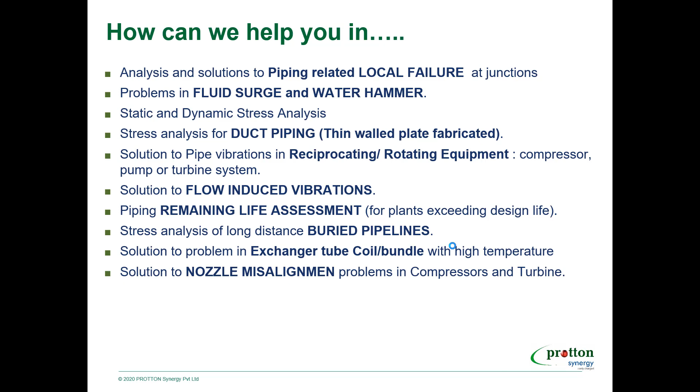Our niche capability is to solve industry problems, and therein I realized we should have more awareness towards FEA and CFD. It has been quite long, 25-30 years we have been using software like beam element analysis, and the stress engineer should know something more than that.

So my first question is, you can definitely write in the chat box: what is the most accurate method? Analytical method, FEA method, or experimental method? These are the three methods by which you can solve the problem.

So we have got the answer as FEA, the most one. Okay, analytical is the most. Actually, to be honest, experimental is the most, because you are actually doing the experiment and you are getting the answer for that given boundary condition with all kinds of plus and minus.

So if I keep experimental aside, not involving it into the things, because we engineers first prove everything is correct on paper and then go for experiment - if I keep aside experimental, then the analytical is most accurate. So analytical method is the one which is the most accurate one.

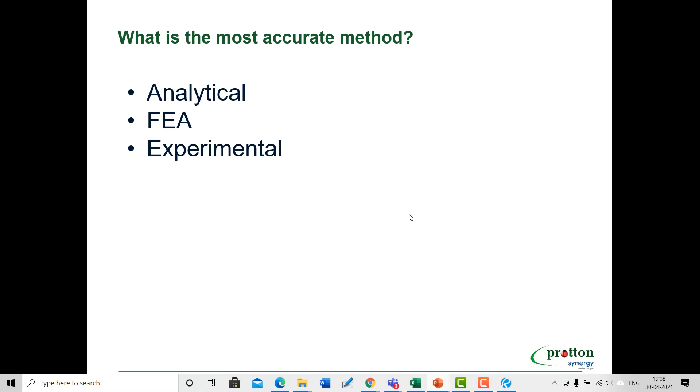Now just moving ahead, if there is a simple problem I want to solve, which is having a cantilever for example, and I want to have the deflection of this cantilever, then I do have a formula like - let me see here.

Okay, so I can have a formula like WL cube by 3EI, which can give me the answer. Now this can be done by an analytical method and at the same time with FEA. Now the main difference is, when we are doing the analytical method, we are mainly interested in the fixed point and the point of application of force, but whatever is happening in between, we do not know much.

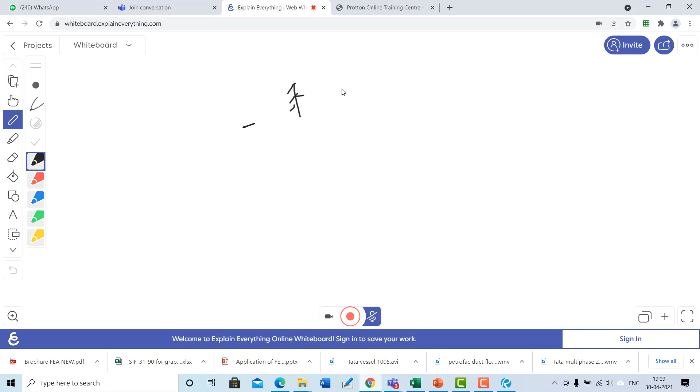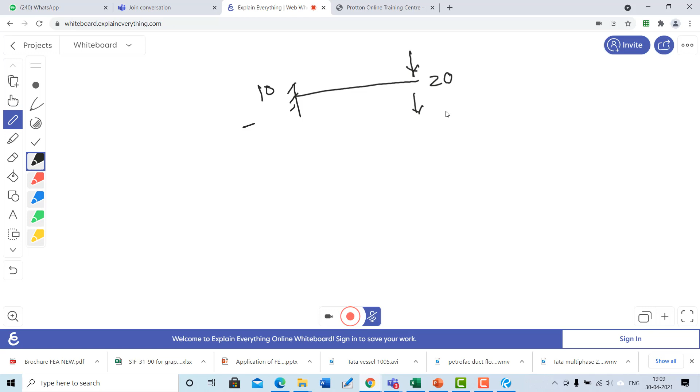Or in the pipe stress analysis software, okay, when you apply a force, say node number 10 and 20 - I won't take any name of the software, you know all the softwares - what happens is that I get the displacement of say minus 10 mm, and here I get the displacement as 0. So it means if I want to draw a line, it would come like this. But in reality, the deflection could be like this.

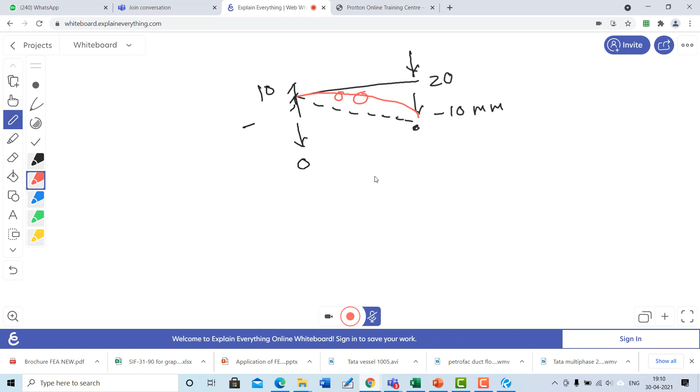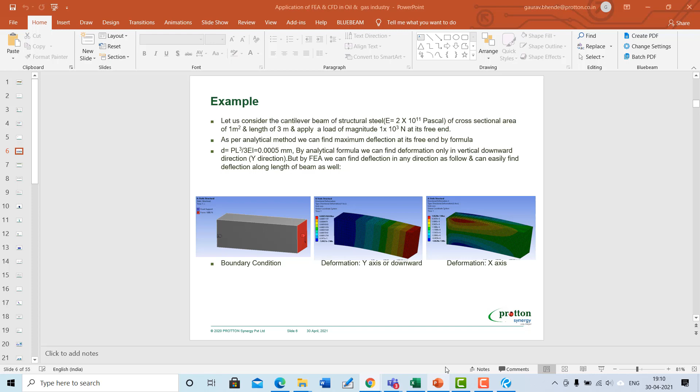So I do not know what is happening in between, and this is called a shape function. So if I don't know the shape function, then I don't know what is happening in between, and here the FEA helps you by breaking it into various, or thousands, or hundreds of elements.

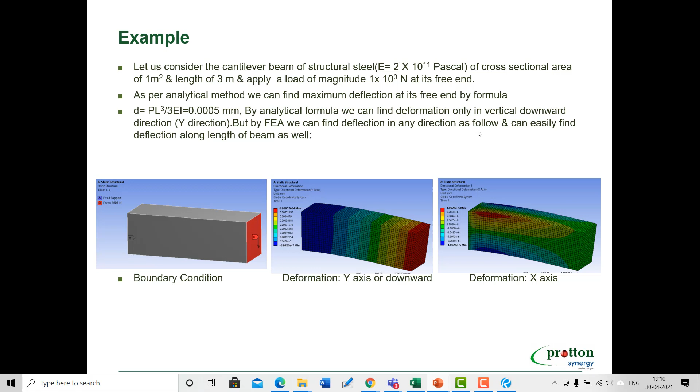Definitely we are not going to discuss deep into what is FEA. This is not the class for that. It's mainly the class of case studies wherein you are interested. So today not only FEA, we are going to even talk about CFD. Most of us take them as the same. Definitely both are numerical methods, but they have some differences.

They are the ones wherein the simulation of any given physical phenomena uses numerical techniques. So they actually simulate what is going to happen at different points. Now when you go with the element method like FEA, it uses the element method to solve with the understanding that the volume is constant. And when you go for CFD, it uses the volume method.

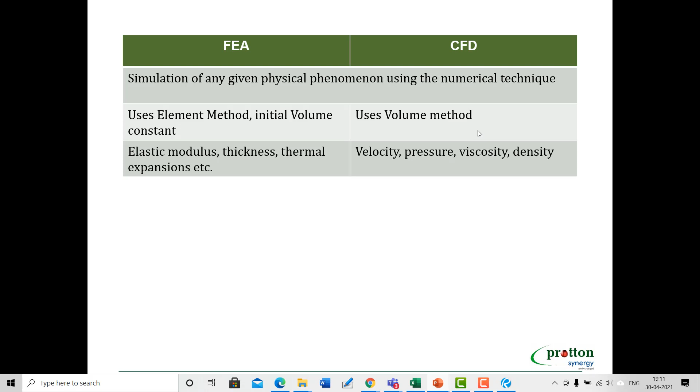For FEA, you deal with elastic modulus, thicknesses, thermal expansions, etc. Whereas for CFD, you are more interested in the velocity of the fluid, the pressure variations, the viscosities, the densities - all those matter. So today the main focus is on FEA, even though we are going to discuss a little bit of CFD case studies as well.

Now the calculations are made for every single element, and then it is combined. So what we do is try to break the problem into finite objects, and then try to merge them. Why do we do so? Because, as you just saw, with shape functions we don't know what is happening in between, but by making the problem discrete, we use elements and we know everything about the elements.

So if the problem is split into elements, the answer for any irregular geometry - like not a pipe, a hexagon, or even a random shape - becomes easy.

So why we are performing FEA and CFD is because the conventional software, the software we use, sometimes provides a conservative answer. Every time when you do not know anything - for example, I don't know the stress intensification factor for a 45° T section, and somebody tells me to take the 90° T SIF and multiply it by 2.5 without any basis. As a stress engineer we hear from here and there, listen to our seniors, some emails and all, and straight away say it is 2.5 without a base. The conservative approach may not be right all the time.

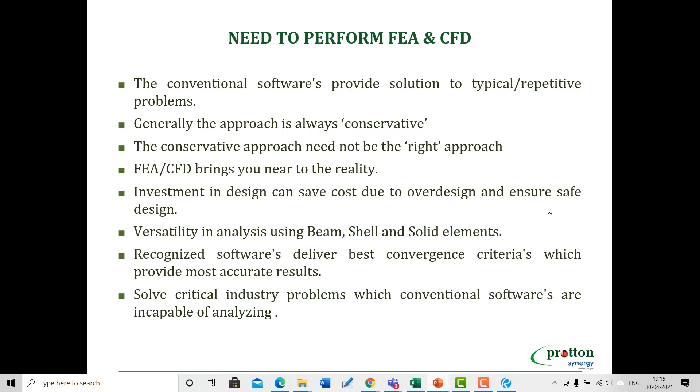The versatility in the analysis using beam, shell, or solid elements - it's your choice. The recognized softwares deliver the best convergence and solve the critical industry problems we are actually interested in.

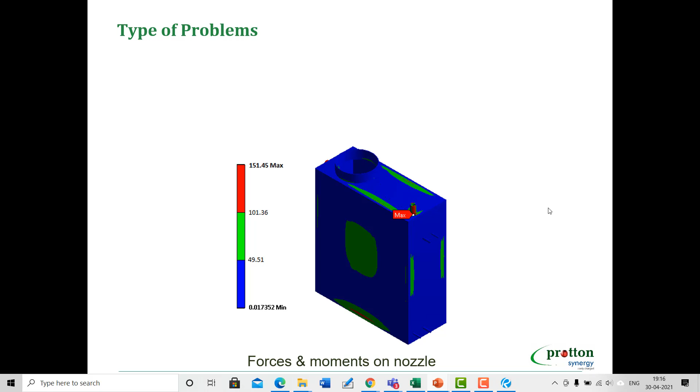Now let's take one of the common problems. Generally you deal with forces and moments on a cylindrical shell. Now this is a rectangular shape, and this small nozzle has a problem of forces and moment. Let me know whether this problem falls under which kind of category - static, dynamic, linear, nonlinear - what kind of category it is. Just let me know the answers in the chat box.

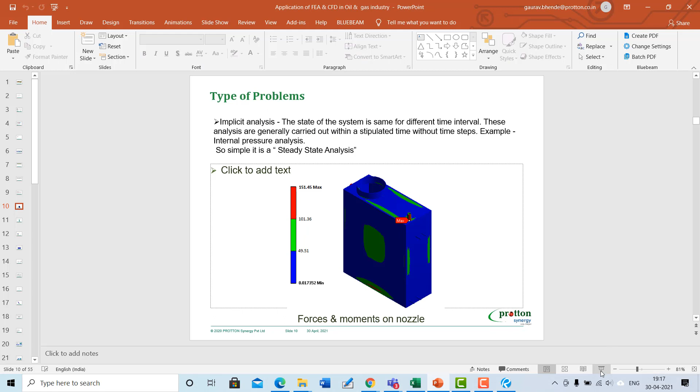Since it is having forces and moments on it, this is very important. As a stress engineer, let's not be only an engineer who knows a particular software and does the software entry. Always ask a simple question to yourself: if somebody takes away the software from my hands, will I be able to give the solution?

That's the simple answer. So this kind of problem is a simple steady state analysis. Nothing is changing with respect to time, and that is our assumption. In FEA language, we call it an implicit analysis.

The state of the system is the same for different time intervals, meaning it's not changing. For example, in internal pressure analysis, the pressure is given and is steady for all time. So what are the longitudinal stresses, what are the hoop stresses? These problems are called implicit.

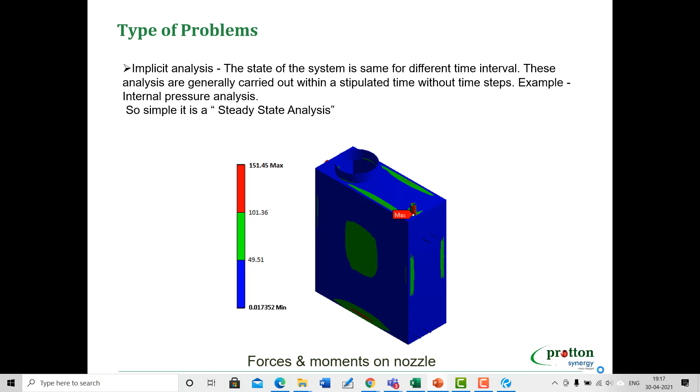These kind of words you will hear from the mouth of an FEA engineer quite often. As a stress engineer, if you are dealing with an FEA engineer, you should know this.

It means that initially there is tension in the bolt—this is a commissioning stage, I would say. Now the pressure comes in, and when the pressure comes in, the flanges would like to go apart, away from each other.

Now here we have two time intervals: one is the pretension, and second is the pressure acting. Somebody wants to check both of them. The simplest way in our stress analysis is a kind of load case, but we cannot do this kind of analysis in our software, and this is called explicit.

The state of the system varies with time interval, and that is what we call a time-step analysis. The variable time is a crucial factor. The duration of the analysis is defined by the end time and the steps.

Examples are seismic analysis or this kind of bolt pretension. In seismic analysis, what we call it is a dynamic analysis, or a time history analysis, or more precisely a response spectrum analysis. These kind of analyses fall under explicit.

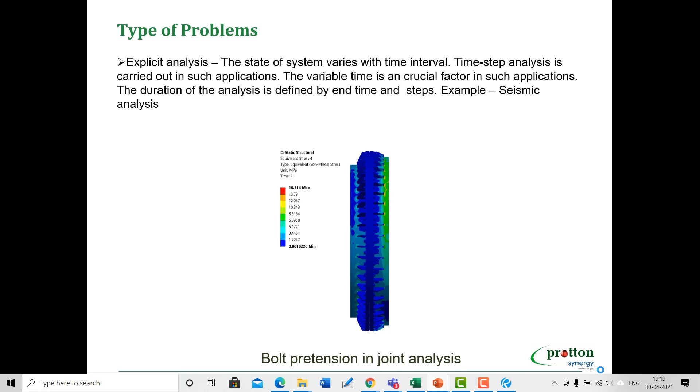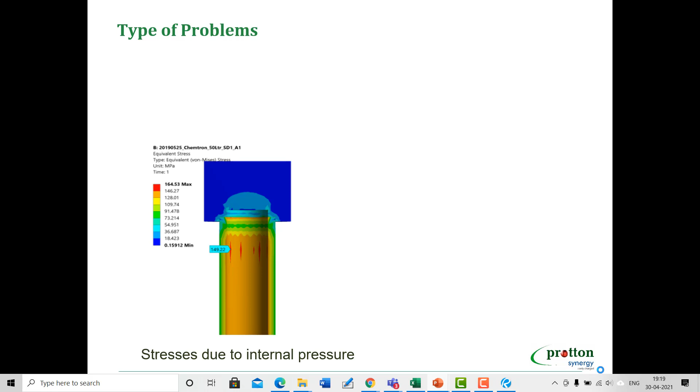This is one more thing wherein, say for example, some forces and moments I want to study at a junction. Now if my stresses are within the stress strain curve, below yield strength value, then this is called a linear analysis.

So all your primary stresses, for example weight and pressure driven stresses—the allowable limit, all of you know, is minimum of 1/3 of ultimate or 2/3 of yield. So the code is not allowing you to cross the yield strength.

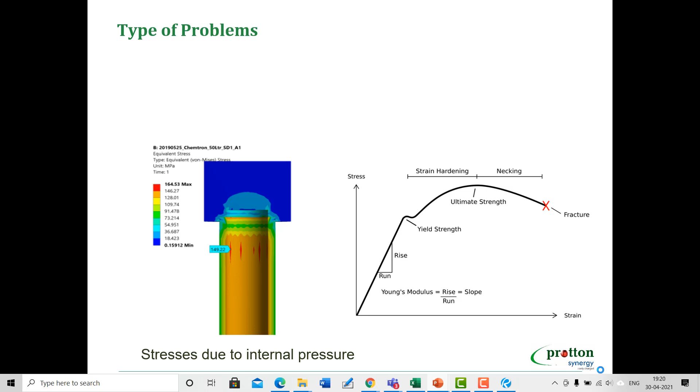But when it comes to a problem of secondary stress, for example thermal stress or temperature driven stress, the code—I am talking about code 31.3, or Section VIII Division 2, or Section VIII Division 1—allows you to cross the yield strength limit as well, because those kinds of stresses are self-limiting, and in that case you can cross the yield strength.

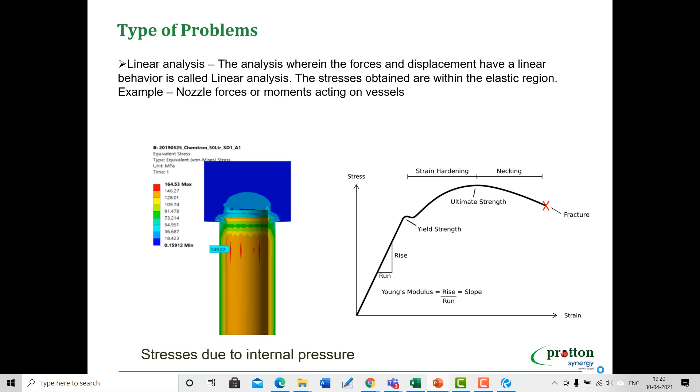Now when you are not allowed to cross the yield strength, the approach becomes a linear analysis approach. So the forces and the displacements have a linear behavior, Hooke's law is valid. This kind of problem falls under linear analysis.

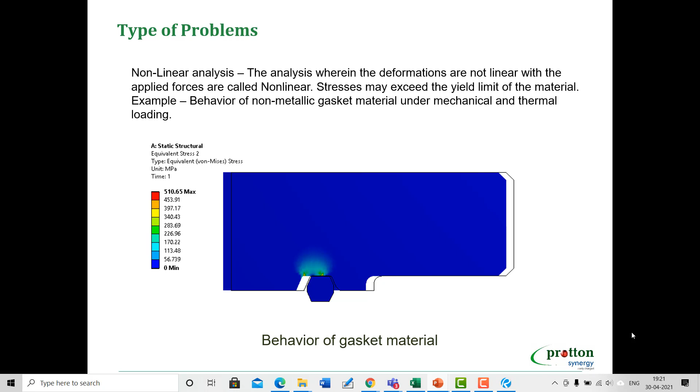Now all of us know that when the gasket is compressed, it can sometimes go beyond the yield value, and if it goes beyond that, there could be a permanent deformation which can even cause a leak. If you want to analyze such a problem, it falls under non-linear analysis—where the deformations are not linear with respect to the forces. So even non-metallic gaskets or non-metallic things can also go into a non-linear analysis. As a stress engineer, we should know this.

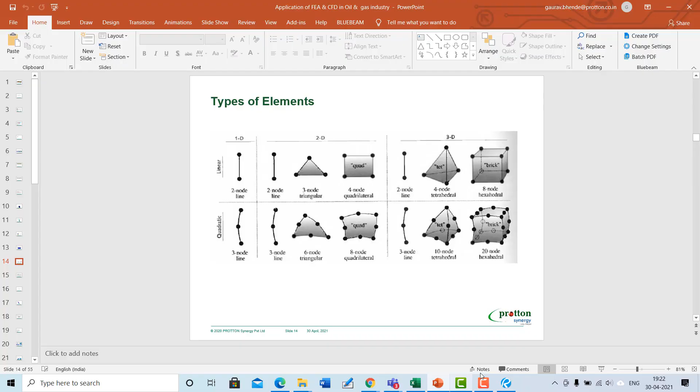Now one more question. We are using this software - do you know which kind of element is being used inside it? Can I get the answer in the chat section? For normal softwares where we come across pipe stress analysis, we go with the beam element.

The beam element is very good when the diameter is not much changing, the thickness is not much changing, but the length is changing a lot. So at that time we are more interested in a beam element software.

Now these beam element software cannot analyze the shell. So even if you see a nice 3D pipe in your software, with good color, blue, gray, shadow effects and everything, the client thinks you are really modeling a complete pipe. But no, you are not. Those who have used very older versions know that the pipe used to be shown as a simple line, the way it is shown here as a 1D element.

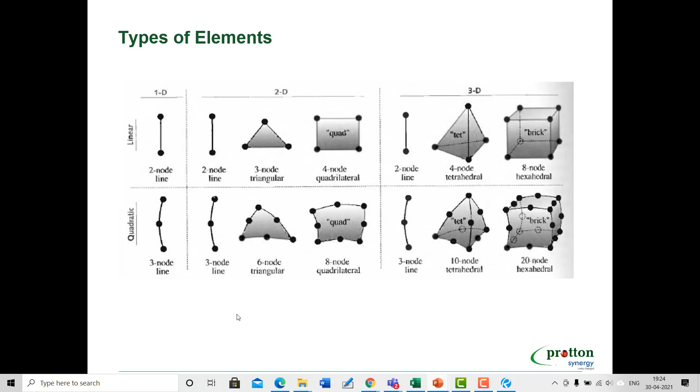So when it comes to FEA analysis, we have got various elements - the 2D elements, the 3D elements. What is the use of these elements? For example, if I go with the 1D element, I think we have got a comparison.

Now you can see here the comparison of 3 elements. It is representing only the dimensions, meaning the length. When it's giving only the length, the other two aspects - area or volume - you are entering them, you are not building them. That's why in software you enter diameter and thickness as a property, but it is not getting built. So whatever is getting analyzed is assuming that the pipe is a thin dimensionless beam.

When you want to analyze a shell of a pressure vessel, or a pipe to pipe junction where there is an unreinforced T or stub-in stub-out, then you have to develop the surface. Just imagine you have playing cards in your hand, and you take one card each and paste it on the pipe, forming a pipe - that is a 2D element. Each playing card has an area but negligible thickness, so it cannot do any analysis accurately across the thickness. That is the 2D shell element.

And if you have a brick in your hand and you're building a pipe brick by brick, as if building a cement pipe, then the brick in your hand is a 3D solid element. You know everything about that brick, so it gives the most accurate results. Now regarding computational time and accuracy - the 1D elements are very fast but less accurate across the area and thickness. The 2D are a little more accurate, and the 3D have the highest accuracy.

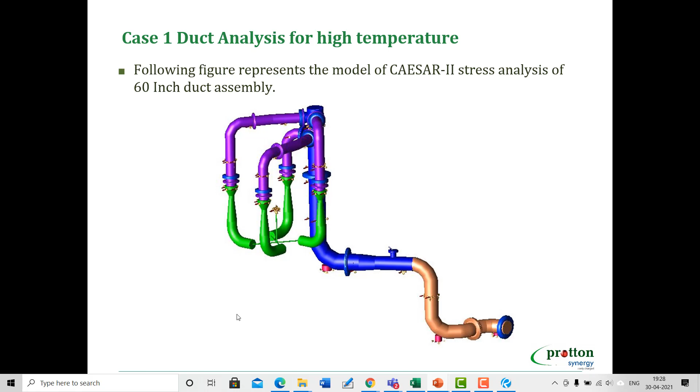Yes, you can use Caesar, but you cannot calculate the accurate SIF, and you cannot do buckling analysis using Caesar. For those aspects, you have to use other software. But if you want to do a simple bending calculation, weight calculation, thermal expansion, yes, you can very well use Caesar.

In this case, our case study, or our scope of work, was to calculate the stress intensification factor. All of us know that Appendix D of 31.3 says that if the D by T ratio crosses 100, then the formulas given are not accurate, and you can go for a better or alternative method. So how do you calculate the SIF?

Now people even talk about 31J, which has come very newly. I don't know how many of you have actually read 31J - it's a thin book, probably a couple of hundred pages or even less than that.

Now when you want to do an FEA analysis, you have to refer to ASME Section 8 Division 2, which tells you the SIF definition as range of peak stress. When I say range, it is on the upper yield and lower yield side, and that's why in the denominator there is a 2 present - 2 into moment by section modulus, which is nothing but the nominal bending stress at that point.

If you see the next equation, PL plus PB plus Q plus F - this nomenclature a stress engineer must know. It is even used in WRC: the primary stresses or longitudinal stresses, the bending stresses, the secondary stresses, and the last portion is F, which is nothing but the peak stress.

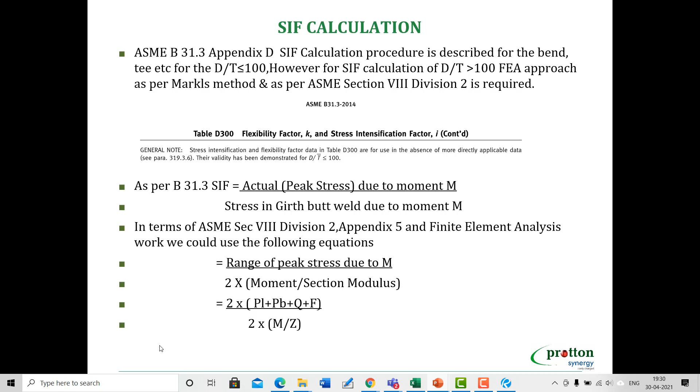Now the peak stress cannot be calculated by hand calculations - therein you need the software. So this was our case study for a 60-inch duct assembly. Diameter was 1540, thickness was 8 mm. Now look at the temperature - 700 degrees Celsius.

It was an excursion temperature, a small time temperature. Normal design was 360. So when you are doing such a high temperature analysis, you come across so many problems, and you should know the code in depth.

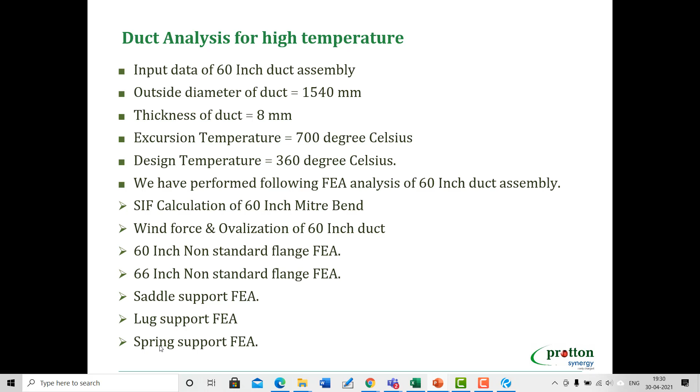So Ninad or Amit, would you like to add something on how we have done the analysis? Because I would even like to introduce it to my team.

That is the use of finite element software, because we cannot model these stiffener rings and evaluate their effect in a beam element software.

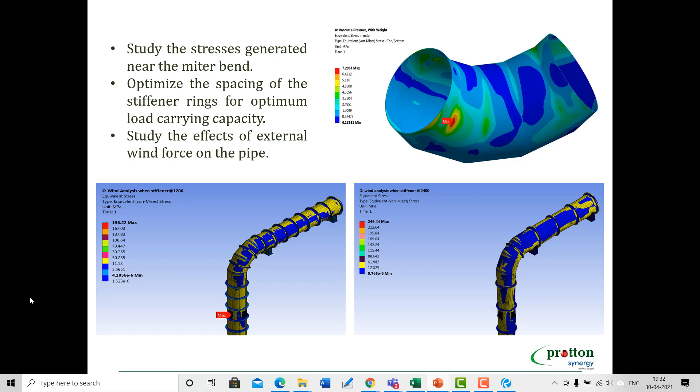These failures may not happen immediately at site because they are secondary in nature, and in such cases we may have to do FEA - even the tee SIF, the stress intensification for T.

One of the misunderstandings regarding FEA software is that when you do FEA, the SIF always decreases. That is one of the misunderstandings. It means when you find any failure in your beam element software for, say, a 24 inch by 6 inch branch, people always say do FEA and qualify it, but that's not always the case.

Especially we realized when we did the duct SIF, sometimes B31.3 SIF are lower and FEA SIF are twice or thrice that. So we have to come out of this approach, or understanding, or belief that FEA always solves all the problems. It solves, but it will give the realistic answers.

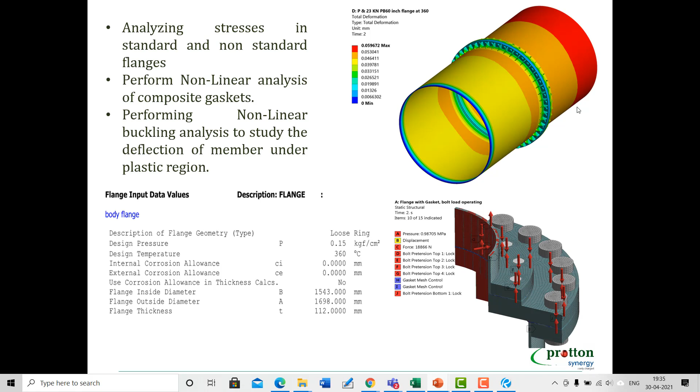So there could be a difference of radial growth. So we had even suggested the groove across the bolt, wherein the bolt can radially move freely. And then we wanted to check whether the flange leaks or not. So for that, we checked the seating stress, whether the gasket is seating or not. So these kind of analysis, when it comes, the FEA is very much useful.

So in this case, if you go with the stresses, then the stresses can go beyond the limit. And at that time, you have to take help of strain based analysis. So very few engineers know that there is a strain based analysis as well, and which can be used, and even code allows it. So I'll be showing you one of the slides afterwards, wherein there was some strain limitations given. So instead of checking the stress, we check the strain, and it is allowed for the secondary stresses, not for the primary.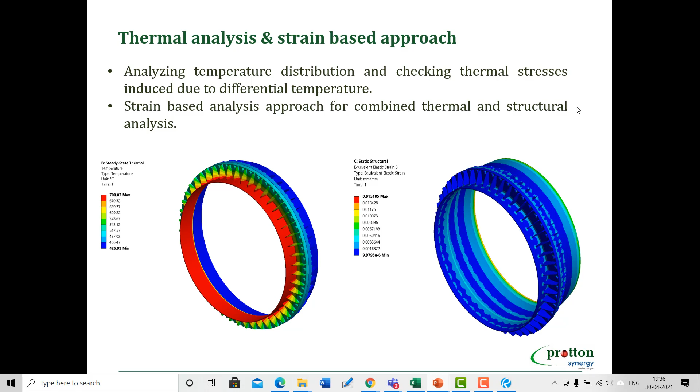So all these aspects we have to study. Stress analysis is not only data entry and data out. This is one more case study we did. It is an assembly inside the heater, okay, wherein so many punctures were given to one common header. So the entire analysis was done in beam element software, the software what we use, Rohr2, Caesar, AutoPIPE, K-pipe.

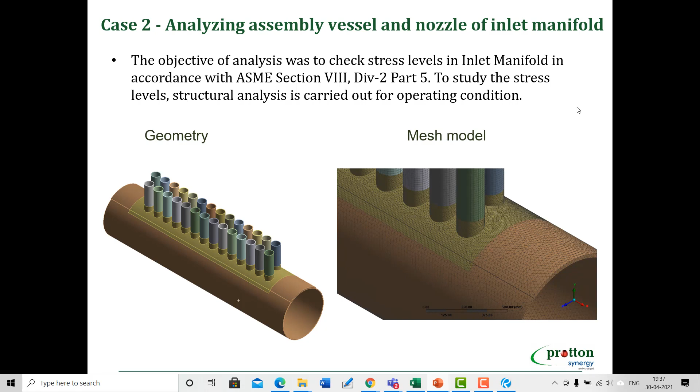But there are some provisions, or rather restrictions, given in ASME code, that when the punctures are very close to each other, in the close vicinity, you cannot use the normal SIF what we have. So you can't just give the SIF at each and every point and get rid of it. It's not allowed. So for that, the FEA is required.

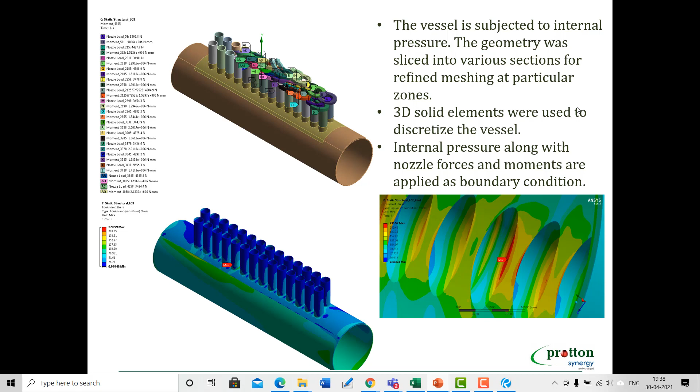So we have done, so the boundary conditions were taken by the beam element software. Boundary condition means the rotations and the displacements, and the forces and moments as well, and local stresses were checked. So don't be under the impression that in FEA software you should be able to model the entire duct assembly or entire heater coil. That will take millions and millions of nodes. So the FEA shall be used at local problems, and we had used the 3D solid element, this kind of thing.

Now here you can see when the stresses are crossing the limit, there is something called linearization, what we have to do. Okay, so linearization tells you when you get a peak stress, because something comes red in FEA, and that is the reason why stress engineers are afraid even to check the FEA report, because they don't know what to check.

And even by having this seminar, or by having the FEA training or learning, at least if you're able to check the FEA report, that is also a good achievement. Even if you add in your CV that I can check FEA report, that's a good thing. Now the standard FEA training what you get in various institutes after college, they only talk about the FEA as a software. But when we teach FEA, we talk about the oil and gas industry exclusive codes and standards.

That's why this seminar is to have the awareness. FEA is very widely used in the automobile industry or defense industry, where the shapes are random, but it's very negligibly used in our industry, and that's why we are not aware of these terminologies as well.

When I do the linearization, the answer is exactly the same. If I ask you, why in 31.3 we check primary stress separately, secondary stress separately, and occasional stress separately, why don't we combine them and check? Why do we have different load cases? The simplest answer is, if I get a failure, how would I come to know, if I combine all the cases, whether it is because of pressure or weight, temperature, or earthquake, because all of them have different modes of failure.

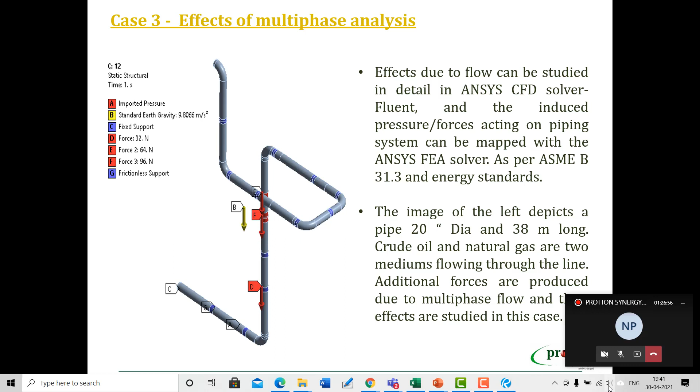So this is a fluid structure interface analysis that we did in FEA and CFD. First we did this analysis in CFD, computational fluid dynamics solver, and we later mapped those CFD results into the FEA solver, so that we can get the actual exact forces and pressure at the node points, and we can map those into the FEA solver. Please move on to the next slide.

Now what happens in such kind of analysis is the liquid phase, that is the crude oil, tries to capture the gaseous phase until the velocity increases and the kinetic energy of that medium increases. So there are induced forces because of this action, and the kinetic energy of that system increases. Now the main parameter for fluid induced vibrations is the kinetic energy that can be caused because of closing of valve or opening of valve or obstructions or multi-phase flow. So this is one of the applications where two-phase flow causes induced vibrations in this system. Moving on to the next slide, please.

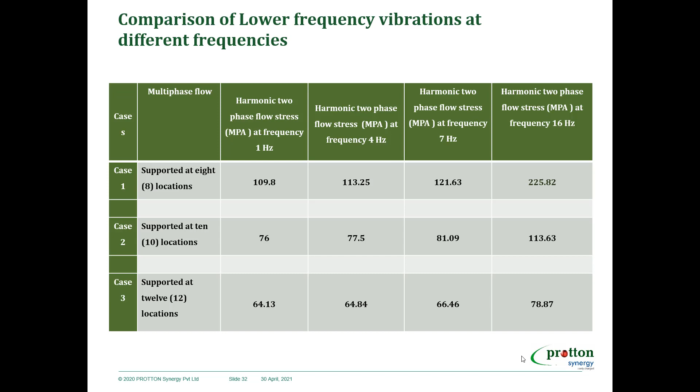So this is the allowable limit that you have for the particular material. The allowable limit in this case was 115 MPa, and we carried out harmonic analysis, that is lower frequency analysis, and from that analysis we saw the stresses at 1 Hz, 4 Hz, 7 Hz and 16 Hz. We had a few support conditions or support locations throughout the pipeline, where the pipe was supported at 8 locations, 10 locations, and 12 locations. From this table we can find that when the support assembly is supported at 8 locations, the stresses are around 225 MPa for the 16 Hz frequency, and during 12 support locations the stresses are quite within range.

And when it comes to civil applications, there were a few constraints while applying supports, and that is the reason. You can see the blue region, this is the support conditions that you have in the system, and initially 8 supports were provided, and later the supports were increased and 12 supports were provided for the system. It was necessary, and this was carried out using the fluid induced vibrations phenomena.

The methodologies for FSI, the full form of FSI is fluid structure interface.

Ninad, I'm just interrupting. Can you see the video on the screen? Yes, sir. Okay, fine. Now you continue.

So this is from two-phase analysis. This video depicts two-phase analysis. You can see the movement of liquid and gas throughout the line.

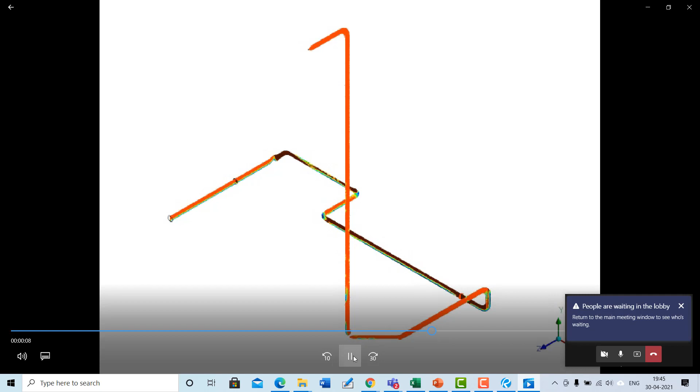And so in such kind of applications, during bends, there are forces which act on the bends due to the flow, and we need to restrict those forces and constrain those forces. But number of supports increases the costing in the system, and that's why we need to provide such kind of similar supports.

Okay, good. So here are 2-3 things what Ninad is trying to tell. So those who have just joined, Ninad has told one thing wherein there is a change of velocities because of the phase changes which can happen, which as a stress engineer sometimes we do not know, and even our process people, we don't have that much close interaction with them. So they just give us the pressure, temperature and everything. So my personal opinion is even the stress engineer should know the flow regime.

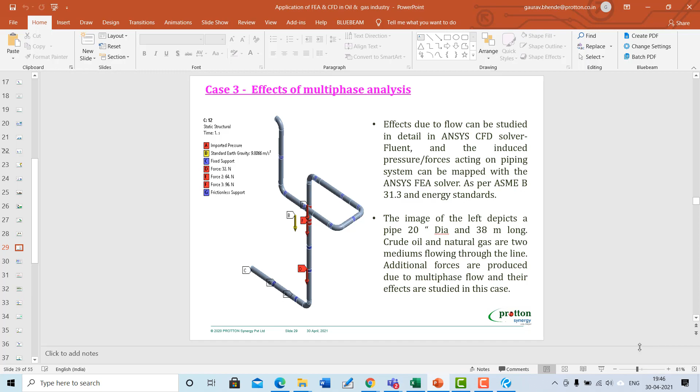And that's the reason we have started doing the surge and all these kind of things, wherein we try to superimpose both the aspects, the surge, the fluid and the structure. Yeah. Okay, Ninad, go ahead.

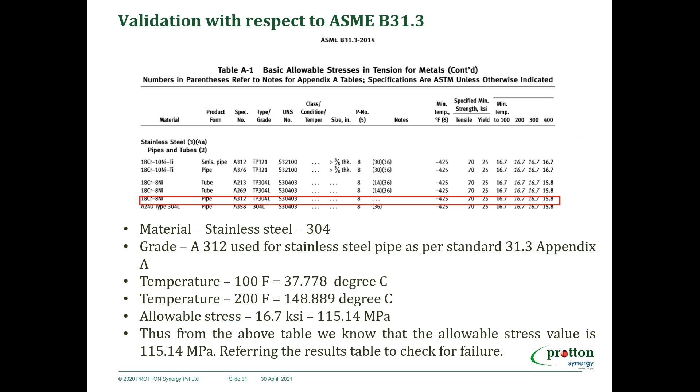Okay, so can I go to the next case study? This one? Yes, sir. Yeah. Yes. Now, this is an interesting one.

Injection quill is very common for us, wherein what we do is we have got a header and we are injecting something. Now, this is being supplied by a manufacturer or a fabricator. So the simple question the consultant asked, since there is a change of pressure and the temperature, means the pressure inside the header and the pressure inside the injection quill are different.

So will there be any thermal shock? Because there could be a sudden change of temperature, and at the same time will there be any vibrations? So this was a case study what we did.

Ninad, can you explain, or Amit, on this case study further? There were 4 different mediums that were passing in the line. There were 2 different mediums from the header line and 2 different mediums from the quill side. So there were altogether 4 different fluids that were passing in this medium.

Now, due to the geometric constraint, there were turbulences created when the fluid moved out of the quill region, and the quill experienced a thrust because of the fluid flowing through it. At different points when the fluid passes through the quill, there were pressure differences and turbulences that were created. As I earlier mentioned, these turbulences cause induced pressure in the line, and we had to check what are the induced forces because of the turbulence caused in this particular domain or region.

So I am showing a video - I hope you can see that, let me know if not. So these are the 4 phases.

Ninad, can you explain these 4 figures, because we should understand? Yes, sir, yes, sir, yes, sir.

Yes, sir. So the nomenclature is that red is one phase and blue is the second phase. The bottom 2 images are the fluid flowing in the header region, and the top is the fluid flowing in the quill region.

As you can see, the upper chamber is the gas chamber and the lower chamber is the liquid chamber in the header part. Similarly, during the inlet at the quill side, the top chamber is the gas chamber and the lower chamber is the liquid part. So after the simulation, the fluid from both inlets mix at the outlet.

There is turbulence created, and because of this turbulence there are higher forces, and that's why we need to map these actual forces that we get from the CFD to the FEA solver.

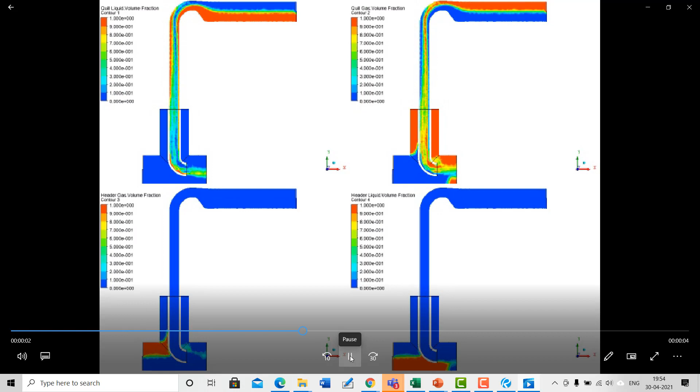And since we know this, we can even do a life fatigue analysis for this quill, which can tell you how many years it can survive, or how many cycles it can survive. So this is important.

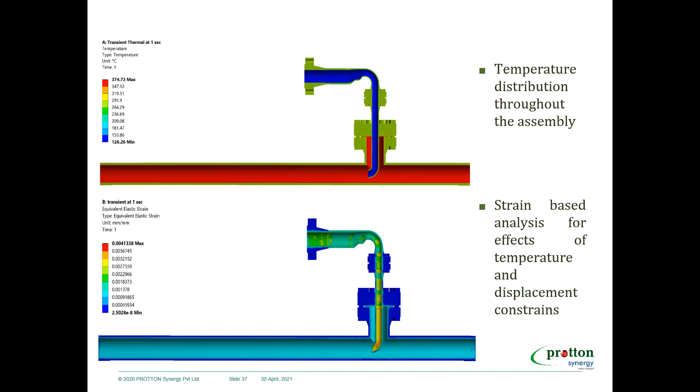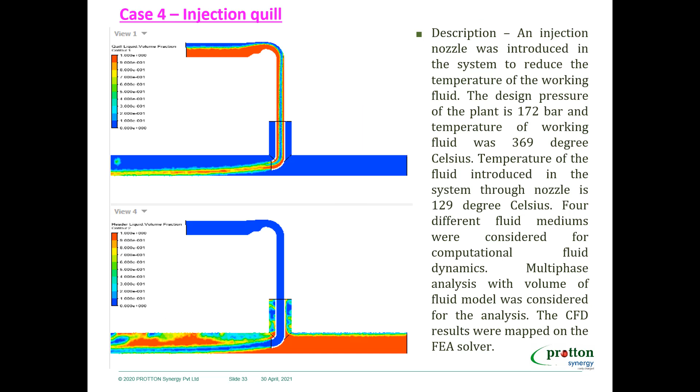One second, can you go to the top slide? Previous one, yes, previous one. Yes, here, just the top slide. Yeah. Just go to the next slide, next slide please. Next one, yeah, yes, here.

Here we can see that we have performed CFD and FEA analysis, but here we have also performed CAESAR II analysis. Yes, because the one who is working in the oil and gas industry, if he knows only FEA, it's fine, but if he knows Caesar as well, that is the advantage.

And if he knows only Caesar, they all know Caesar, but if they know FEA as well, that is the advantage. No FEA, yeah, exactly, that is right.

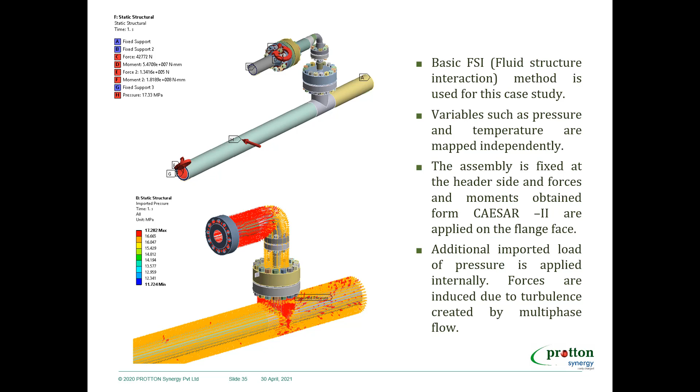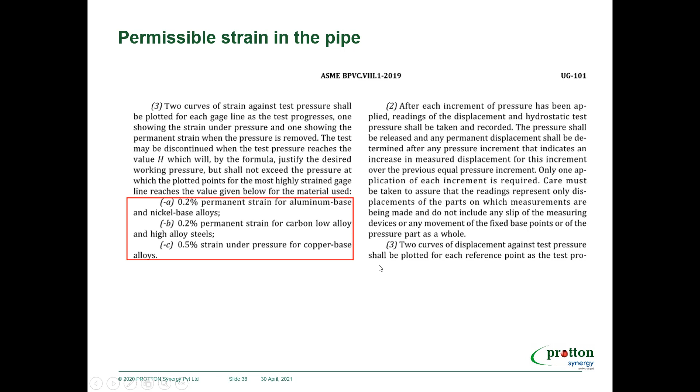So there are other references as well, but we should know these references and where to use them and in what way. Now this is for those who are from the mechanical static side who have joined us.

This vessel looks very normal, but on the right hand side there is a boot, and after the boot there is a saddle. Earlier this saddle was on the left hand side of the boot, and it was very close to the first saddle, and the boot was a cantilever one.

But the client said it's not possible or not recommended, and they shifted the saddle beyond the boot. Because of the space constraint, the saddle was very close to the boot, so they increased the local thickness by adding a doubler plate, meaning the pressure vessel shell is given higher thickness at a local area. You can see here a small white line, and part of the saddle was on this doubler plate and part was not.

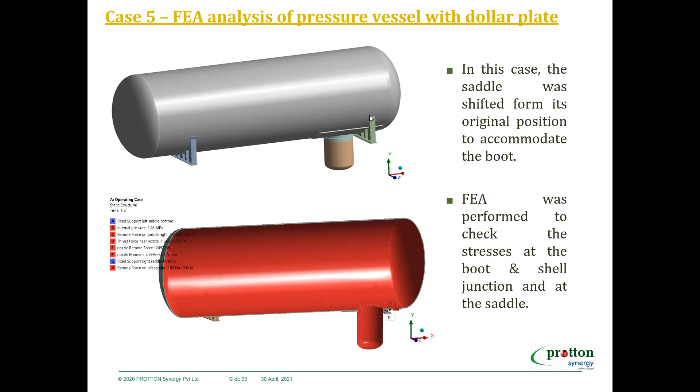When this kind of thing comes up, the code does not give you a direct solution or direct guidelines, and then it calls for FEA analysis. Here we learned a lot of things. Though the problem looks very simple, we learned how the pressure can show failure or the stress concentrations at the junctions.

Amit or Dinat, can you share the experiences of what we learned in this specific case study? So after we did the FE analysis, we found that there were bending forces introduced because internal pressure was applied on the boot region, and because of that the boot was slightly shifted downward, and the saddle being very close to it, we found higher stresses.

You can see a max point over here. So there were higher stresses induced in this web plate. There was also a center web plate, not shown in this image, but after analysis, yes, we had to remove it because there were higher stresses induced in that web plate.

We had to do linearization at the shell region, the boot region, and at the web plate of the saddle to check for the primary membrane stress and the stresses produced due to bending, and then qualify it with respect to the ASME standard. And there was a thrust because of the boot as well.

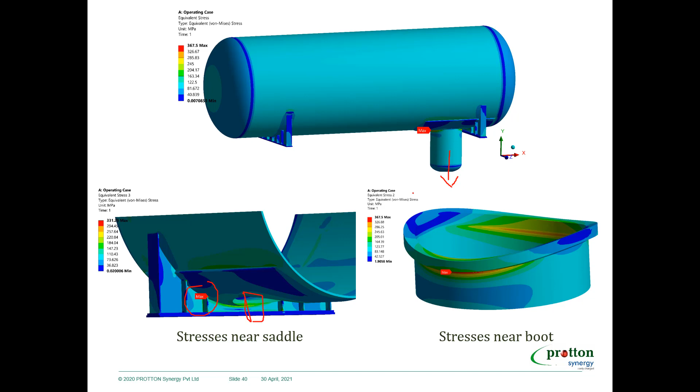So because of the pressure, you can see the pressure thrust. It's a very small video of 3 seconds.

So you can keep on repeat. I don't know where it is a repeat. Keep on repeating. Toggle. I don't know where it is a repeat.

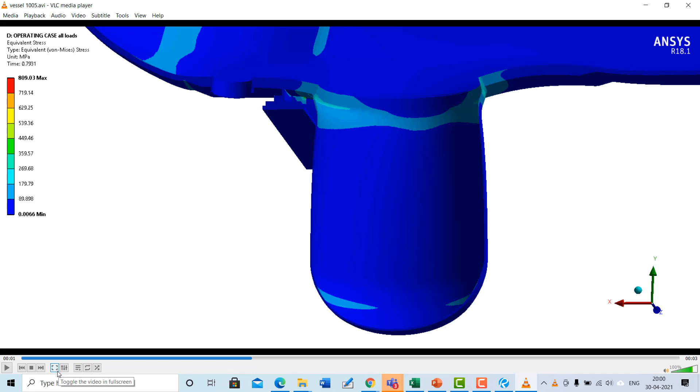So this analysis was very small work, but we learned a lot.

One more thing I want to add is the thickness of the doubler plate was approximately 60 to 90 mm in different tags, but when it comes to the boot, the thickness was 50 mm. As per different conventional softwares with respect to internal pressure calculations, it was qualifying, but for this particular application, because of the thrust force, we were getting higher results at the junction and at the saddle part.

Okay, Amit, can you explain the different kinds of stress limits? Yes, this is a table provided in ASME Section VIII Division 2. As discussed earlier, there are various kinds of stresses. Generally there are two types: primary stresses and secondary stresses. The primary stresses we classify as general primary membrane stress, local membrane stress, and bending stress. For example, stresses due to pressure come under the primary stresses.

Due to the pressure, membrane stresses are developed, like hoop stress or longitudinal stress, which develop across the thickness of a cross section under consideration. These are the general primary membrane stresses.

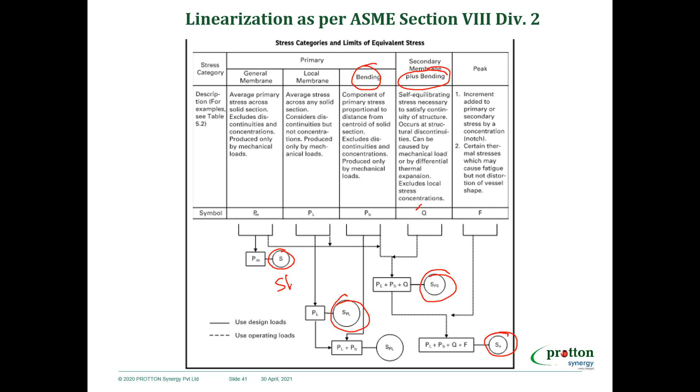This is the same limit SH, that is 2/3 of yield or 1/3 of ultimate, whichever is minimum. Based on the combinations, you can go to various limits, and the user should know which equation to use for which kind of loading.

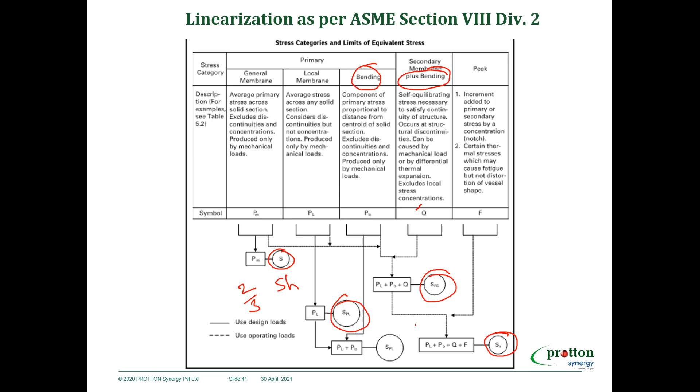Otherwise, sometimes even after doing FEA, you get failures that are not checked by the code properly, or not the way they should be checked. So you need proper guidance for that. This is the gap in information or knowledge that we try to fill up in our training sessions by taking actual real life case studies, to help you understand this.

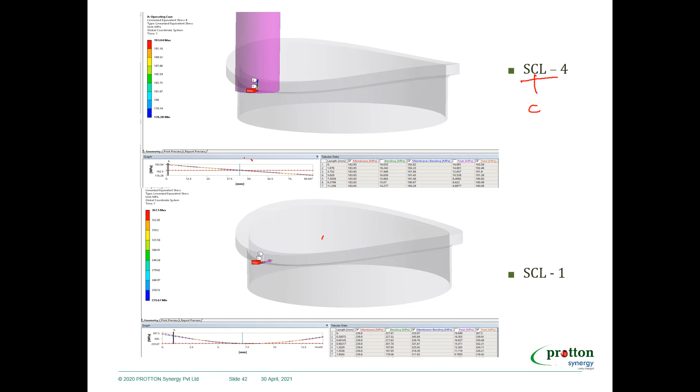So these are the lines of SCL, that is stress classification line - C stands for classification - which tells you whether it's primary or secondary, and these lines tell you what kind of stress it is.

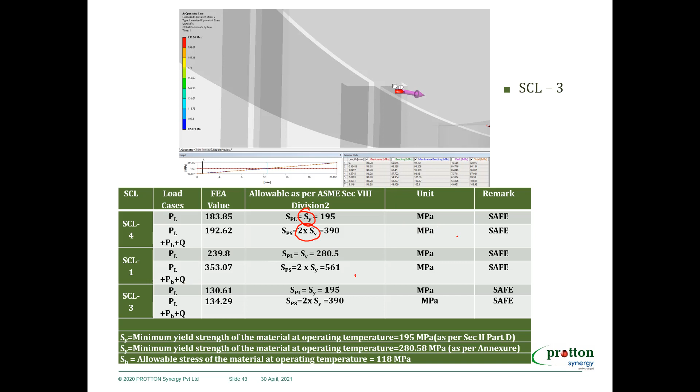Then here are the actual results, showing which kind of stress is to be used against which kind of allowable. You can see here 2 times SY is the allowable. Based on the type of combination, you can check whether it is safe or not. So by doing FEA, you can even save cost as well.

Now this is a pressure fatigue analysis. In our normal pipe stress analysis software, people often ask me, can we do a fatigue analysis? My second question is always, which kind of fatigue - do you want pressure fatigue or thermal fatigue? The fatigue analysis in our pipe stress analysis software is mainly thermal fatigue analysis. We are not doing pressure fatigue.

What happens is, because of pressure, this surface can actually deform like this. This simulation is not possible in our software because we model a pipe as a simple line, and the cross section is just a property or characteristic of that element - we are not building it. If you want to analyze this, you need to build the pipe as if you are holding playing cards in your hand, keeping them one in front of another. That is how you should build a pipe - that's what we call meshing - using a proper element, like a shell element. Then you will come to know what is happening across it.

For further accurate analysis, if the pipe is thick, you may have to go for a 3D solid element as well. This was a pressure case with 2 lakh cycles - a huge number of pressure fluctuations - and the life was 50 years.

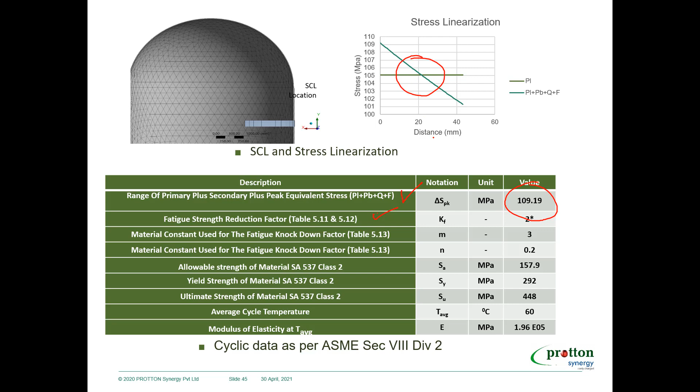Now this is a multi-phase flow analysis which is very important. Here what happened, the process engineer used a software and got the result as intermittent, meaning the phase of the liquid is intermittent. When it comes to an intermittent phase, we call it a two-phase flow, or furthermore a slug. And if the slug comes into picture, what happens?

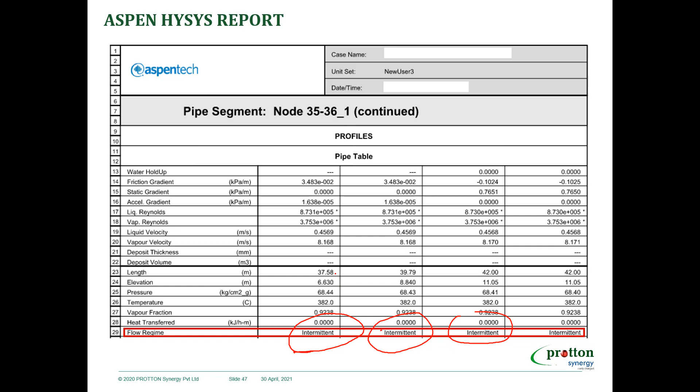It is rho A v squared as the force. Now look at the line size, 24 inch, so the area will be very high. As a stress engineer, if there are two densities given, you take the maximum one. Here the density of the liquid is 657, and the density of the gas is negligible. But you put the 657 density, the area of 24 inch, and the velocity, and you get a force. Since you are doing a static analysis, you multiply by 2, and you get tons of loading for which you design the structure.

So the civil engineer is going to cry. Even your primary supports, which have axial stops or so, will see such a huge force. Now whether it is realistic or not, that's the question, and therein you should use FEA or CFD.

In this section we had about 10% of the fluid as liquid and the remaining 90% as gas, so it was a 10 to 90 ratio. When we did the analysis, what we found is that the type of flow we are getting is a churn flow, not a slug. So we are getting a churn flow into it, and that's why the requirement of such a heavy force is not necessary.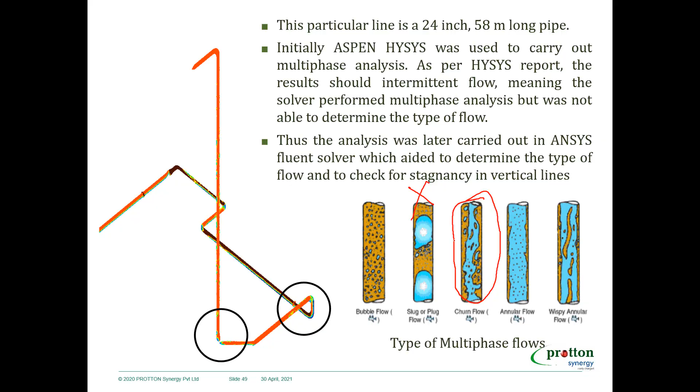I think we have an animation for this as well. So this was that animation. In this case you can see there are very few pockets of blue color which represent the liquid. Most of them are red, representing the gas. So we gave them a verdict that you need not consider it as a slug.

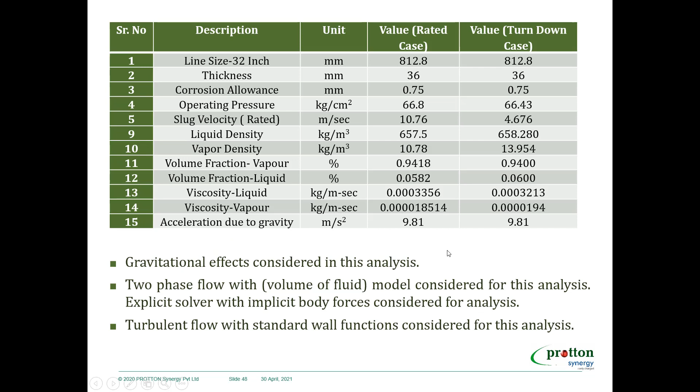You can maintain the natural frequency at 4 Hz if you wish, as a precautionary level, but the support need not be designed for such a high value, and that can save a lot of cost.

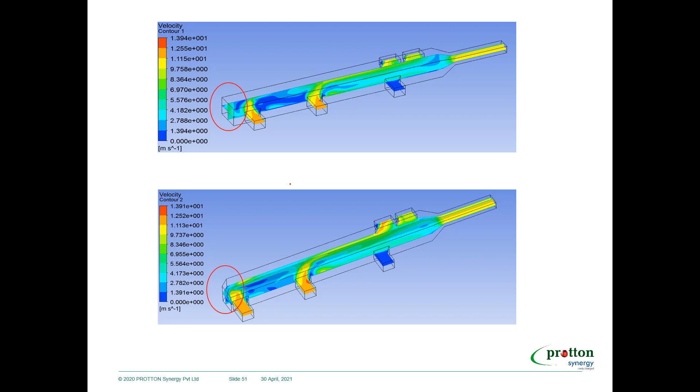Now this is a pure CFD application wherein we had a duct of an air conditioning system. Initially the duct entries were straight like this, but after the analysis we suggested they should go in some direction. We also showed them that this area is redundant, nothing is happening there, so there is a considerable pressure drop. So you can chamfer this part, straight away eliminate it, and have the inlet from here, making the flow laminar, and they wanted to check the pressure drop.

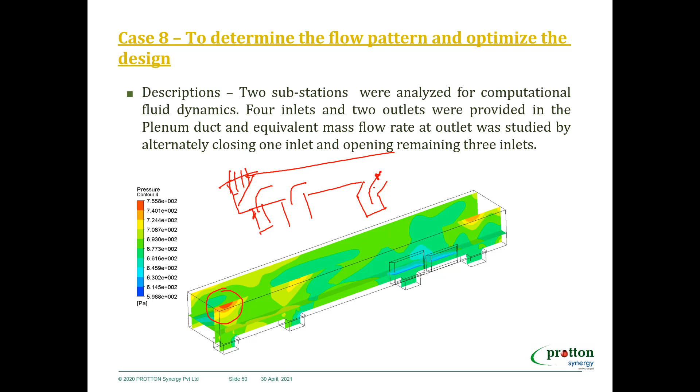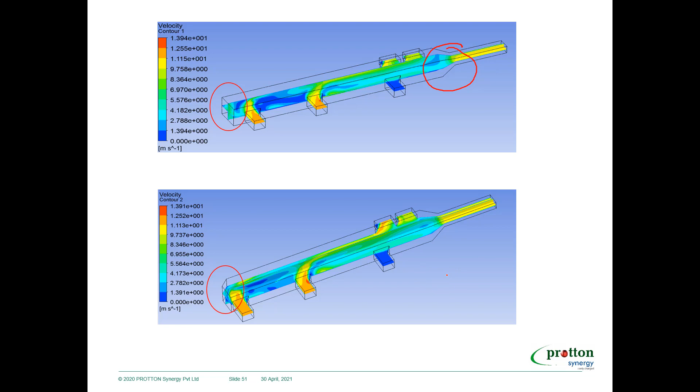So I'll show you these are the different regimes which tell you the velocities, whether they are crossing the limits or not. Afterwards they wanted to know what happens when there is a reduction in area, whether they are getting sufficient pressure drop or sufficient pressure, and the velocities or not. Then they used these results as benchmark results for their calculations, and did the remaining calculations.

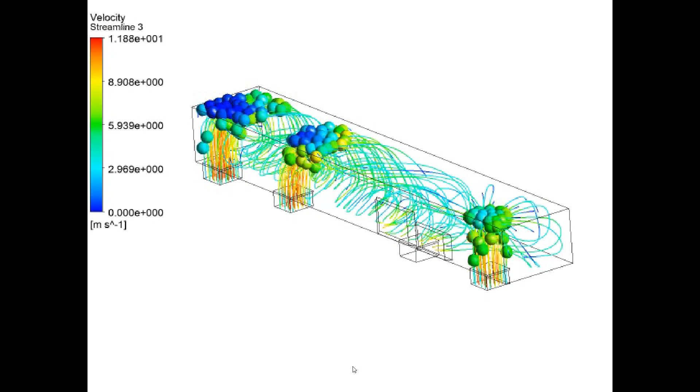So you can see these particles are showing the flow. You can even see at the corners the particles are not moving, so those are the redundant areas where the movement is very low. This really simulates how slow the flow of air is happening, and that's why there is a less pressure drop, how the flow is taking place in a laminar way, where you are finding some kind of turbulence, and whether you should optimize it further.

So Nina, can you just elaborate a little bit about the modules we are going to take?

Yes. The initial module will be the introduction of the course, where we will brief you on the content of the course. Then we will tell you about the finite element method, which finite element analysis is based on. We'll brief you about 2D sketching, and in this course we will learn the modeling aspect, the meshing aspect, the simulation, and then validation of results. After modeling, there is also pre-processing, where you need to extract certain domains, and subtract or combine certain domains.

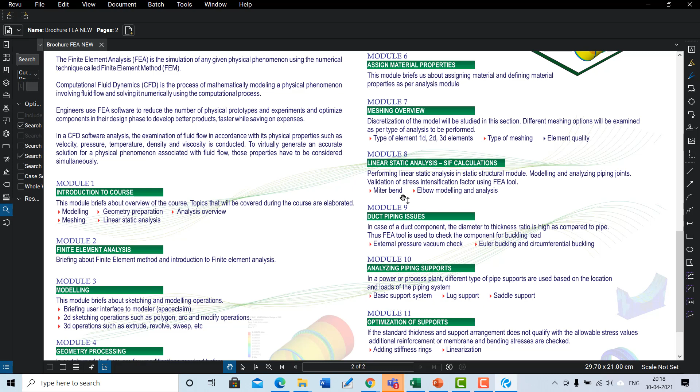After that, we will learn about material properties and how to assign different material properties to the components. Then different types of elements, where to use these elements, their applications in the industry, linear static analysis, and examples like SIF calculations, SIF analysis in FEA analysis, then linearization, optimization of supports by adding lug supports and stiffeners. We'll teach you how to model these components, how to mesh them, analyze them, and how to extract the report and images, and validate the results as per the ASME standards.

Along with that, how to refer the code and how to refer the values in the code. So all these modules, module 8 to module 12, are exclusively for the oil and gas industry. We are not taking any examples from other industries like defense or automobile.